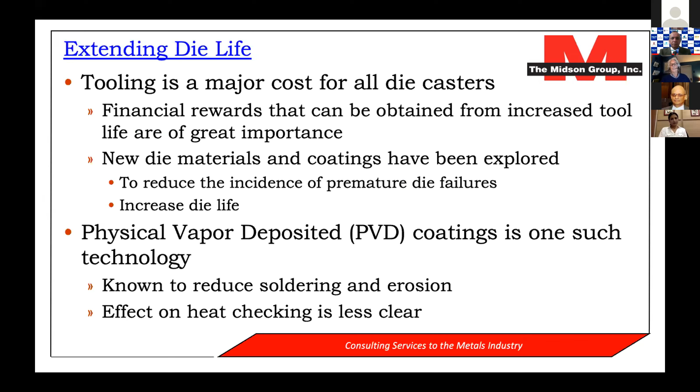So the one I'm going to be talking about today, as we just heard, is physical vapor deposition, or PVD. These coatings are one such technology, and they're well known to reduce soldering and erosion in die casting, but the effect on heat checking is less clear, and that's kind of what I'm going to be talking about today.

Surface treatments are the kind of treatments that we're used to in die casting: nitriding, ferritic nitrocarburizing, where we are diffusing either nitrogen or carbon plus nitrogen into the surface of our dies, normally about 100 microns or so, and we get hard layers on the surface of our die. So those are pretty commonly used in die casting.

Hard coatings are newer, over the last 20 years or so, and basically consist of PVD, physical vapor deposition, and CVD, chemical vapor deposition. CVD is not used a lot in coating dies because normally the substrate temperature has to be raised too high and will soften the die. So PVD is the process that's normally used.

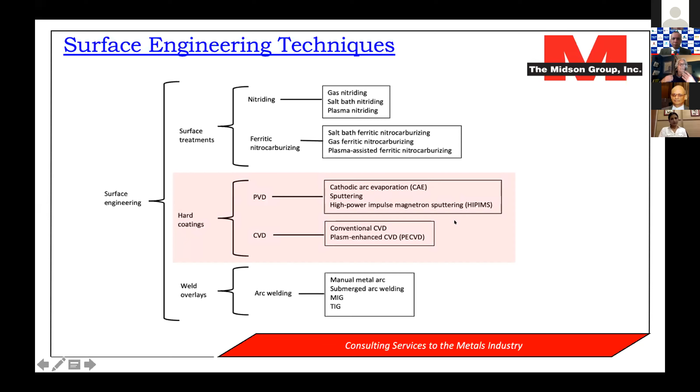Then the third one is weld overlays. Weld overlays, at least in my experience, are not commonly used in die casting, but have been used in the forging industry, where they also use H13 steel dies. So we're not going to really be talking about that today. The focus today is going to be on hard coatings, mostly PVD type coatings.

So in the presentation, as the chairman said, I'm going to be providing some results of a 5-year plant trial that's been going on in the US. The goal of the trial was to examine the impact of applying a PVD coating to an entire die. So any part of the die that was contacted by the liquid aluminum, we put a PVD coating on. I'm not talking about just coating small cores or small inserts, but coating essentially the whole die.

And so the goal was, could we apply PVD coatings and reduce the amount of conventional spray lubricant applied to the die? Basically, can a PVD coated die be run lubricant free with no sprayed lubricant at all? As I'll show a little later in my presentation, we didn't quite achieve that, but by reducing the amount of lubricant due to the PVD coating we got a whole range of other benefits that I'll describe later.

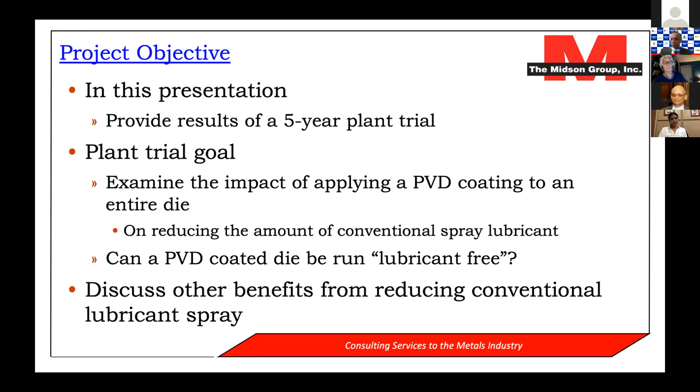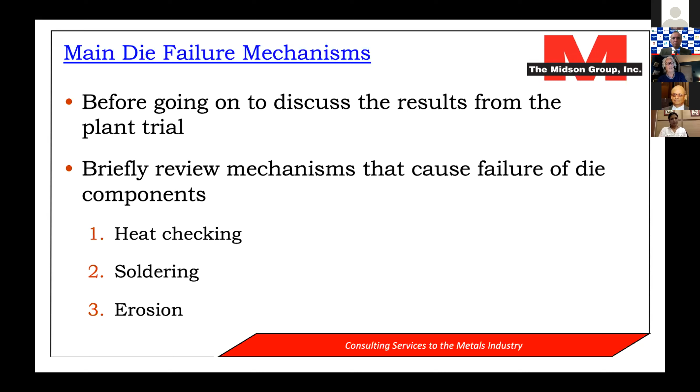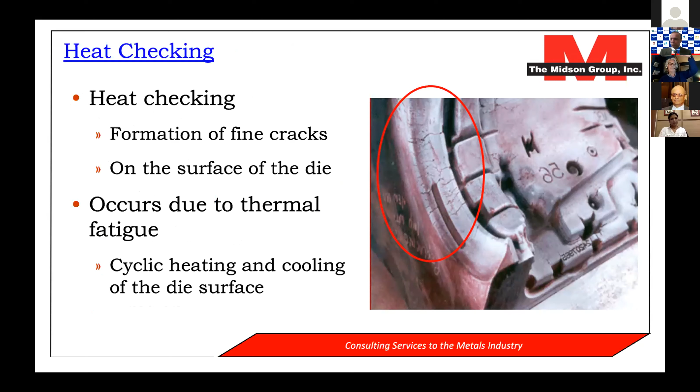So before I go on to talk about the plant trial itself, let me discuss mechanisms that can cause failure of die components: basically heat checking, soldering, and erosion. So let's talk about heat checking first. As die casters, we're all familiar with heat checking, the formation of fine cracks on the surface of the die. This occurs due to thermal fatigue, coming from the heating and cooling of the die surface every time we make a casting.

This figure is taken from a NADCA Congress paper by Jack Wallace and his co-workers from 1999. The vertical axis shows the surface die temperature in degrees centigrade, and on the x-axis we're looking at time in seconds, about 1.5 cycles here. We're looking at about 10 thousandths of an inch back from the die face, about 1/4 millimeter; 60 thousandths of an inch back, about 1.5 millimeters; and 1/2 inch back, about 12 millimeters or so.

So what we see is as the liquid metal is injected into the cavity, the surface of the die heats very, very quickly and then starts to cool. As the cavity is opened, it starts to cool even faster. And then as we spray the surface, it cools really, really quickly. Once the spray stops, the surface die temperature recovers.

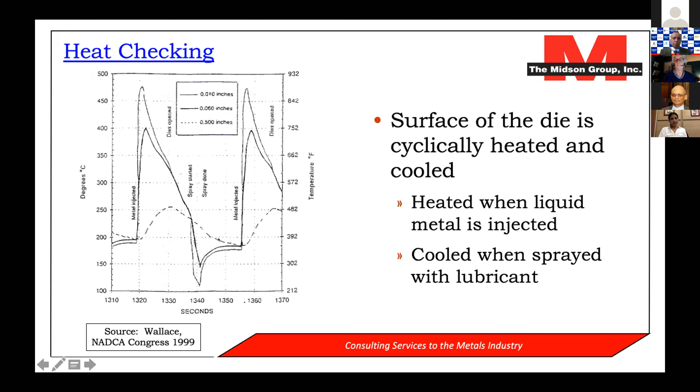But 1.5 millimeters back, we don't see it quite as hot as the surface when the metal is injected, and not quite as cold as the surface when we're spraying. And 12 millimeters back, we still see an up and down, but not as much. What this means is that we get this thermal fatigue cycle every time we make a casting.

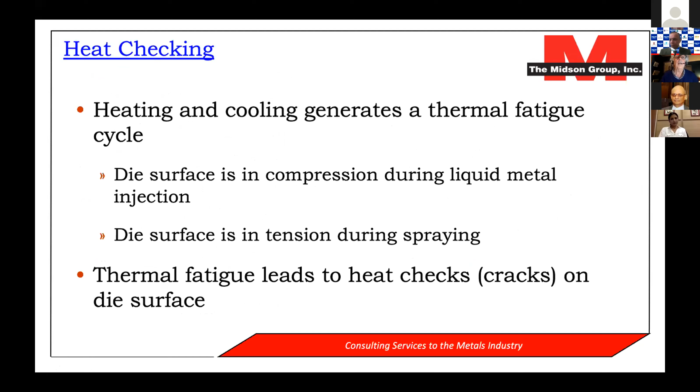When we inject the liquid metal, the die surface is in compression. When we spray, the die surface is in tension. So this tension, compression, tension, compression gives us a fatigue cycle, and this thermal fatigue leads to heat checking, or cracks on the die surface. Then if we go on and talk about soldering.

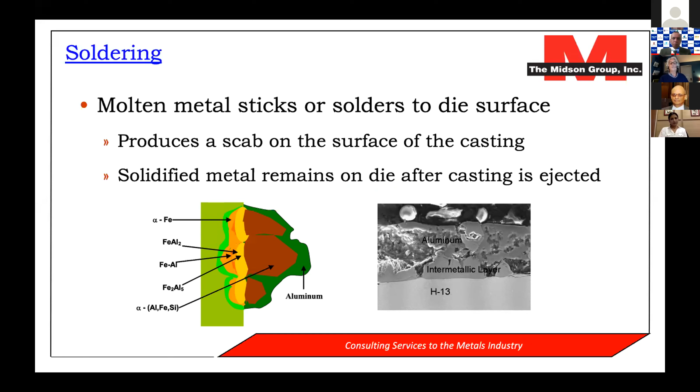Soldering, again, most die casters, I'm sure, are very, very familiar with soldering. This is when the molten metal sticks or solders to the die surface and produces a scab on the surface of the casting once we eject the casting, and then a small amount of the solidified aluminum remains on the die after the casting is ejected.

There's been several papers over the last 20 years or so providing the mechanism for soldering. Back in 2000, Shankar and Apelian gave a 6-step mechanism for soldering of the aluminum to the steel. They said initially the molten aluminum chemically attacks the die steel, mostly at the grain boundaries. And then we get formation of an intermetallic phase between the molten aluminum and the steel die. So the aluminum forms a compound or an intermetallic phase with the iron from the steel. And this phase acts as a glue so that the solidified casting sticks and solders to the steel die and makes it difficult to eject.

A couple of years later, another couple of researchers, Vishwanathan and Han, came along, and they said that they identified a minimum die temperature below which soldering will not occur. So below the temperature, no soldering. Above the temperature, we get soldering. And again, that's kind of familiar to most practical die casters.

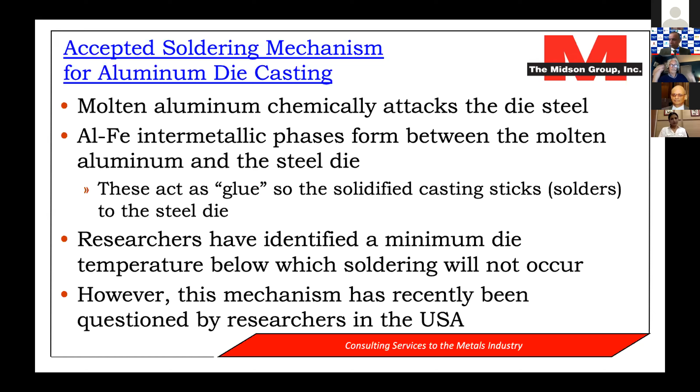However, just in the last couple of years or so, a couple of researchers in the US, Monroe and Sanders, have come along and questioned these mechanisms, whether it really is aluminum intermetallic phases causing the soldering. And so at the moment, at least, the mechanism for soldering is still a little bit up in the air.

And then for erosion, erosion is the gradual removal of the cavity die surface due to either mechanical action or to chemical dissolution. This is not the greatest photograph, but it kind of shows a little bit of erosion here, where part of the steel die has been removed by the action of the molten aluminum moving over it.

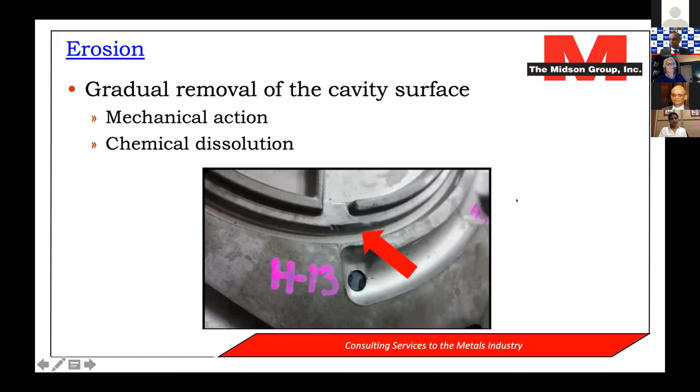And so there's basically 3 mechanisms for erosion. We have liquid impingement erosion. This is when the liquid aluminum, for example, is at a very high velocity around the gate, or maybe impinging directly on a core very close to the gate. And basically the steel die is dissolved by the liquid aluminum.

Then we can also get solid erosion. This is caused by the impact of solid particles during die filling, hitting on the die surface. Where do the solid particles come from? Obviously, silicon particles pre-solidified in the aluminum alloy. Oxides can be very hard, very abrasive, and they can cause quite serious erosion. And then other impurities, solid impurities in the aluminum alloy.

Then a third mechanism for erosion is cavitation. Cavitation is a special type of erosion. This is when we get the formation of small bubbles as the liquid metal is filling the cavity, and then the bubbles collapse at very high velocity and very high pressures against the surface of the die and can cause quite a large amount of damage.

And often we see this more in zinc die casting dies, not because it's more important in zinc, but some of the other mechanisms that we've talked about, such as heat checking and soldering, are less important in zinc die casting, and therefore we see the effect of cavitation because often the zinc die casting dies last a long time.

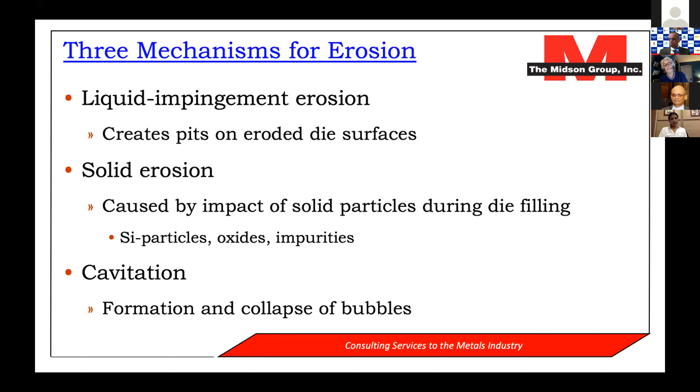So let me go on and talk about the plant trial. As I said at the beginning, it was a 5-year plant trial that was started in 2016. And so initially I'm going to talk about the early stages of the plant trial, and then I'll give some more recent results that we're seeing from the plant trial. So the plant trial was started in 2016 and was based on research results obtained at the Colorado School of Mines.

The research objective, as I've talked about before, is that if we pick an appropriate PVD coating and we apply it to all surfaces of a die casting die, can we totally eliminate the need for conventionally sprayed lubricants? Early on in the project, there was a lot of laboratory research performed at the university, at the Colorado School of Mines, and that showed that an aluminum chromium nitride coating was the best candidate. And so that was picked for the plant trial.

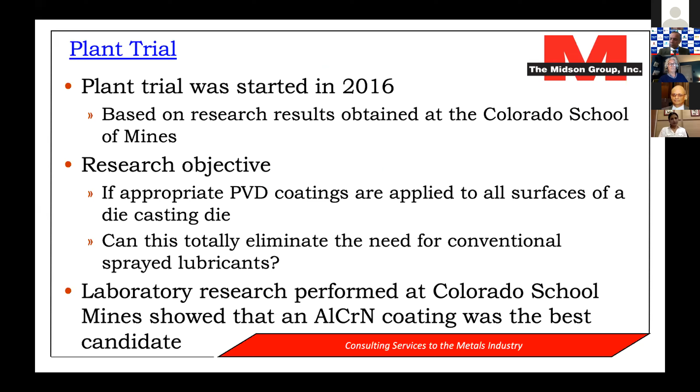So this is the casting that was chosen for the plant trial. It's a balance shaft housing, and it's used in the motor of an outboard motor for marine applications. It's about 150 millimeters by 150 millimeters in size, weighs about 0.8 kilograms. It's produced in a single cavity die using a 700-ton die casting machine.

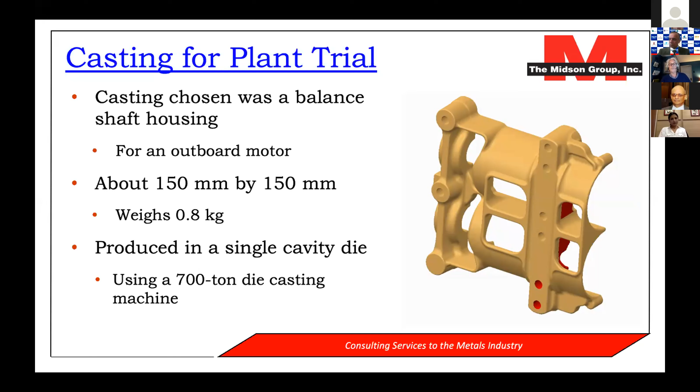And so these are some models showing the moving side and the fixed side of the die. And as I said before, any part of the die that is contacted by molten aluminum was covered with the aluminum chromium nitride. So on the moving side, that included the runner block, the runners, the cavity, the ejector pins, the overflows, the vents, and the vent block. And then it's exactly the same on the fixed side, the runners, the cavity, any core pins, and we don't show the vent block here, but that was also covered.

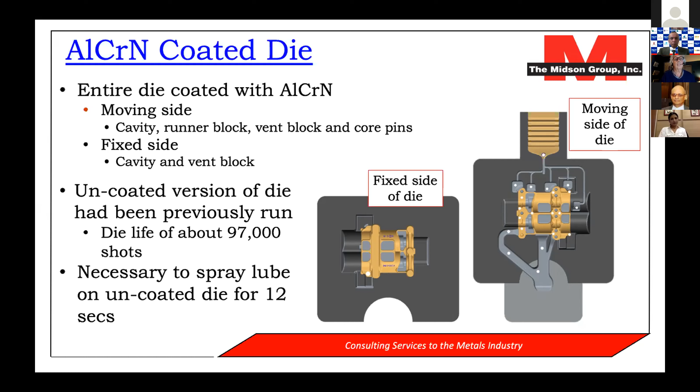What was nice about this die is that the caster that produced it had previous experience. They've been producing this casting for many years, and so they had experience with an old uncoated version of the die. And what they saw is that die had a die life of about 97,000 shots before it had to be replaced. And for the uncoated die, it was necessary to spray lubricant for 12 seconds.

So here are the results of the plant trial. So on day one for the coated die, initially we went from 12 seconds with the uncoated die to 2 seconds with the coated die. That's an 83% reduction in spray, and 70 castings were produced with no evidence of sticking. So then they went down to 1 second of spray, which is about the minimum amount of spray that they could run with their equipment. That's a 92% reduction in spray from the 12-second use previously, and they produced 30 castings with no evidence of sticking.

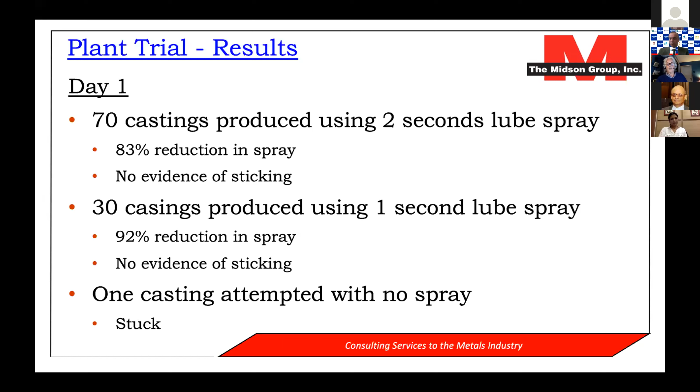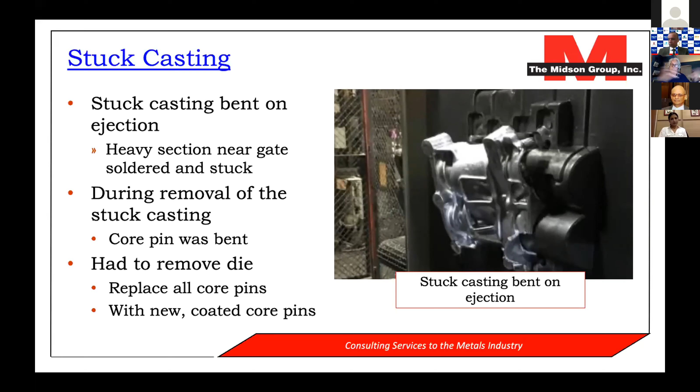So then they went to no spray, and they turned the spray off, and the first casting stuck. And not only did it stick, but it actually bent on ejection, as you can see here from the photograph. And so it looks like heavy sections close to the gate soldered and stuck. And then during removal of the stuck castings, some core pins were bent, so the die had to be taken off the machine, disassembled. Luckily, we had spare coated core pins that we could put back in, reassemble the die, put it back on the machine, and run it the next day.

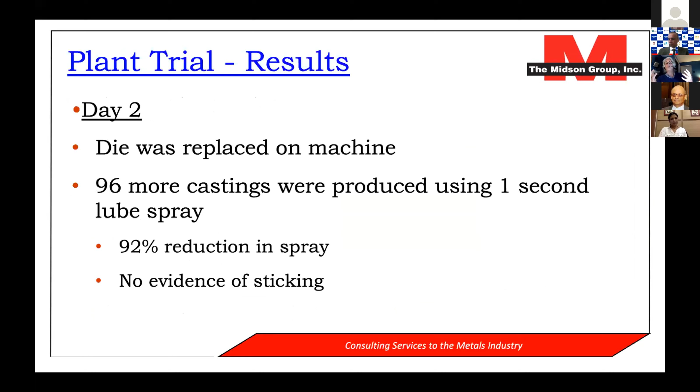And so on day two, the die was replaced, and 96 more castings were produced with this 1 second lube spray. That's a 92% reduction in spray. And again, no evidence of sticking. So we didn't quite get to lube-free, but pretty close. And what we saw were some other benefits that we observed from using the low level of spray.

And the first one was cycle time improvement. We were able to improve the cycle rate by about 12%, so cast 12% faster with the PVD coated die. Why? Because we weren't spraying as long. We used to spray 12 seconds, now we're spraying 1 to 2 seconds, so we can reduce the spray time, so the number of castings per hour is higher, and therefore production costs are lower.

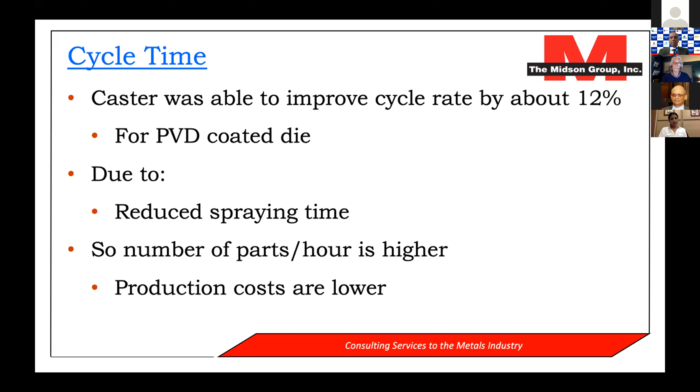But what was kind of interesting is this figure at the top here is comparing cycle times for 11,652 shots produced in the coated die versus 27,733 shots produced in an older uncoated die. And so if you look at the median rate, we can see this is the 11.82, 12% improvement in the median casting rate. But if we look at slightly slower castings, the third quartile, that was faster by 18%.

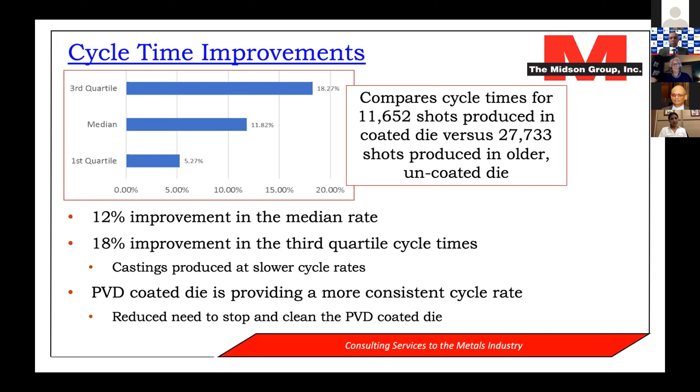And what we think is happening is that the PVD coating is producing a more consistent cycle rate because the caster didn't have to stop and clean the die so often. They didn't have to go in there and clean solder off the die quite as often with the PVD coated die, so they could actually go 18% faster. So a big improvement in cycle rate, which obviously again comes down to cost.

So as I said, that was done back in 2016, 2017. The plant trial is continuing. And so now here's some more recent data from 2019 and 2020. As I said, the information before came from 2016, 2017, but because the caster is only producing somewhere between 20 to 25,000 balance shaft housings per year, they're still running the die. So the plant trial is essentially still continuing. And the PVD coated die recently produced more than 100,000 castings in the same die.

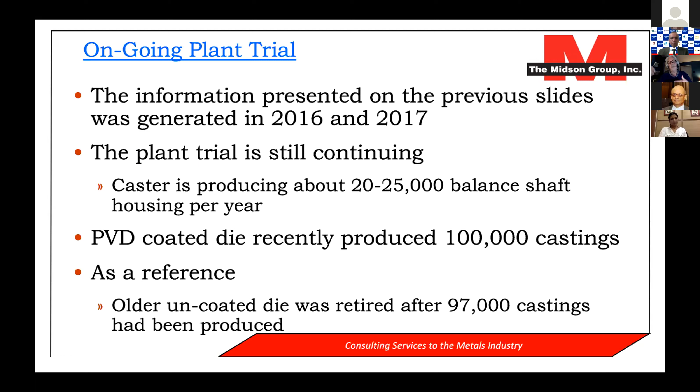I should say that this PVD coated die has required one welding repair operation that occurred after around 75,000 shots. However, the old uncoated version of the die required its first weld repair around 37,000 shots, and had a total of 3 weld repairs by the time it got to 75,000 shots. So only one weld repair for the PVD coated die, 3 weld repairs for the uncoated die.

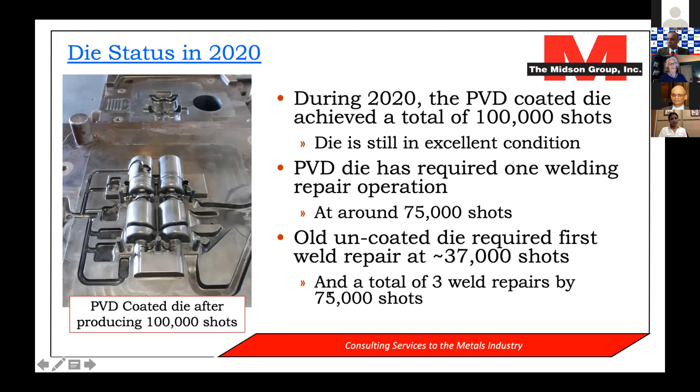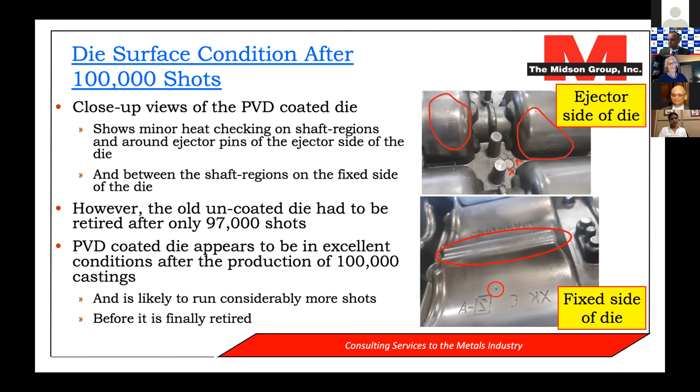So the PVD coated die does appear to be in excellent condition after the production of 100,000 castings, and is likely to run considerably more shots before it is finally retired. This is showing the pictures of the castings produced in the die after 100,000 shots. And because the die looks so good, it's not surprising that the castings also look very good, but they do. And again, here are pictures of a casting produced in the die after 100,000 castings had been produced.

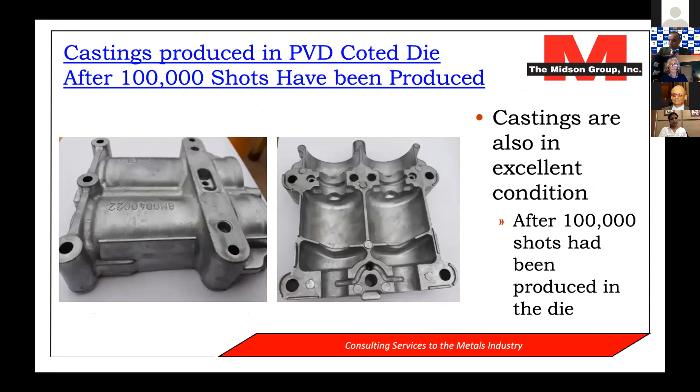So this begs the question, is it the PVD coating itself, or is it the reduction in spray that's allowing for this significant improvement in die life? And I think the answer is we don't really know yet. I'll give you my opinion. My opinion is that I think it's unlikely that it's the PVD coating itself. PVD coatings are typically quite thin, normally somewhere between 2 and 8 microns in thickness. And I think that's kind of thin to have a meaningful impact upon die life.

And the dunk tester takes in a steel sample and dunks it in a bath of molten aluminum for about 10 seconds, pulls it out, lets it cool, and then it's sprayed, and then it dunks again, and it goes through this cycle. It's kind of similar to a die casting cycle. And after 5,000 dunks and 10,000 dunks and 15,000 dunks, they take the sample out and look at the heat checking and characterize it. This laboratory technique has been used in America for about 60 years and has really helped us develop information on die steels and heat treatment and process conditions on heat checking.

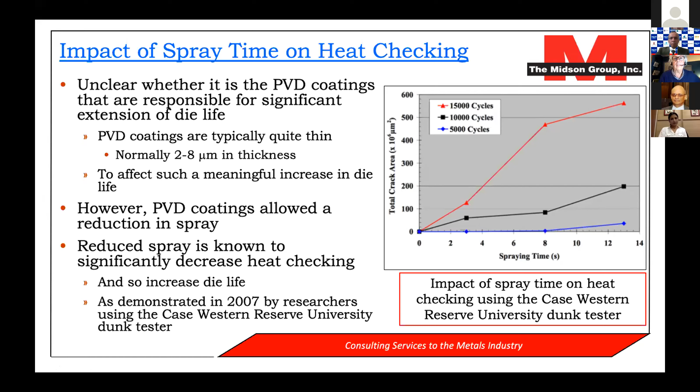And if we go to no spray time, at least in the test they did at Case Western, they saw no heat checking at all. Not to say that we wouldn't in a real die, but that's what they saw. So clearly reducing spraying allows us to minimize heat checking. And so I personally think that the use of the PVD coating allowed us to reduce spraying, allowed us to get an increase in die life. But that's not yet been proven. That's just kind of my opinion at the moment.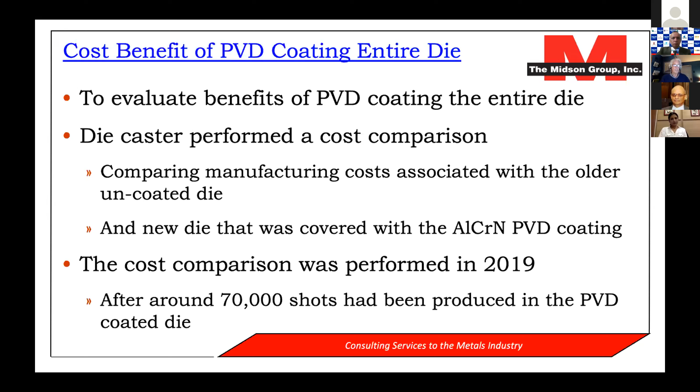What the caster has done is looked at the cost benefit of PVD coating an entire die. They performed a cost comparison comparing manufacturing costs associated with the older uncoated die and the new PVD coated die, PVD coated with this aluminum chromium nitride coating. The cost comparison was actually performed last year in 2019 after about 70,000 shots had been produced in the PVD coated die. And here's some of their findings.

So I talked about this a little bit earlier in the presentation, that the old uncoated die required 3 significant maintenance operations in terms of solder removal and then re-welding small pieces in critical areas. They had 3 significant maintenance operations by the time they got to 70,000 shots. With the PVD coated die at 70,000 shots, maintenance has not been required. The first maintenance was actually required at 75,000 shots.

Clearly reducing the amount of spray you use reduces cost because you can purchase less lubricant, and lubricant is not inexpensive. Improving the cycle time means that more castings are produced. Obviously that affects costs. But probably the biggest one is that the PVD coating, the reduced spray, appears to offset heat checking, and therefore we'll get a significant increase in die life.

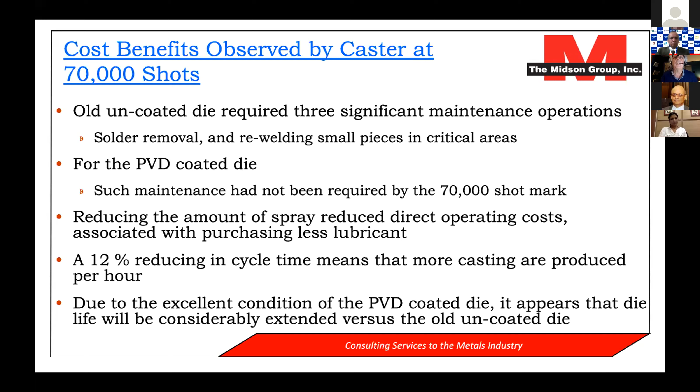So the caster actually did a quantitative comparison and looked at these 4 or 5 different parameters. And they looked at the savings after 70,000 shots as a percentage of the original tool cost. And so reducing die repairs, they said that represents a saving of 10% of the original tool cost. Reduced die lubricant, a saving of 5% of the original tool cost. Faster cycle, 5% saving of the original tool cost. And extending die life is a big one. Obviously, that's a huge one in terms of cost savings.

And so they estimated that. We don't really know the final figure yet because the die's still running, but they estimated that it would be a 25% saving compared to the original tool cost. Now, from all that, you obviously have to subtract the cost of the coating. Doing these PVD coatings, again, is not inexpensive. And they estimated the cost was 20% of the overall cost of the original tool. However, total savings, 25%. That is quite an impressive total savings.

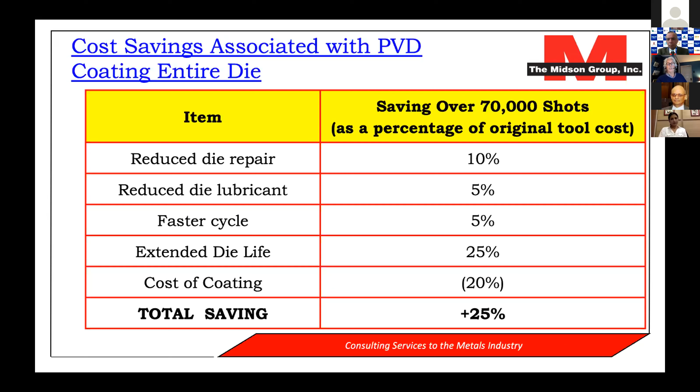So in terms of the plant trial status, the plant trial will continue with the PVD coated die. The plan is to run it to the end of life, so it might take us another couple of years or so to get there. And obviously, we want to determine how many more castings a coated die can produce compared to the old uncoated version of 97,000 shots.

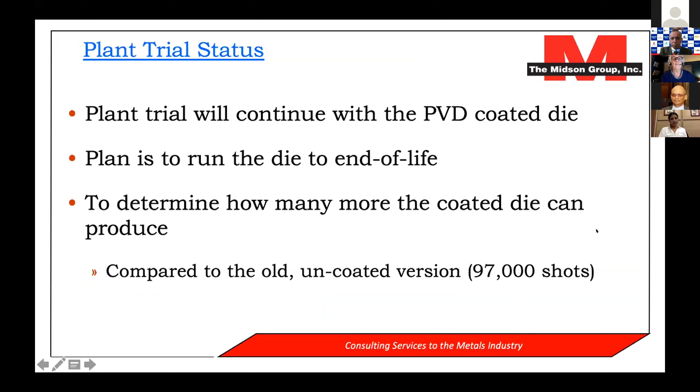So, in summary, it appears that there are many benefits of applying PVD coatings to die casting dies, not just in terms of small cores or small inserts, but larger portions of the die, or maybe, as we did here, the entire die. Firstly, a reduction in soldering and erosion problems. That's been known for a long time that PVD coatings provide those kind of benefits. But apparently you can get an improved cycle time as less time is required to spray the die.

Cost can also be reduced. You're purchasing smaller amounts of lubricants, and expensive die repairs can be postponed to higher shot counts. And then most significant, I think, is that a significant extension of die life can be attained as we get reduced heat checking observed with the PVD coated die due to the reduction in the lubricant spraying times. So that's my presentation.

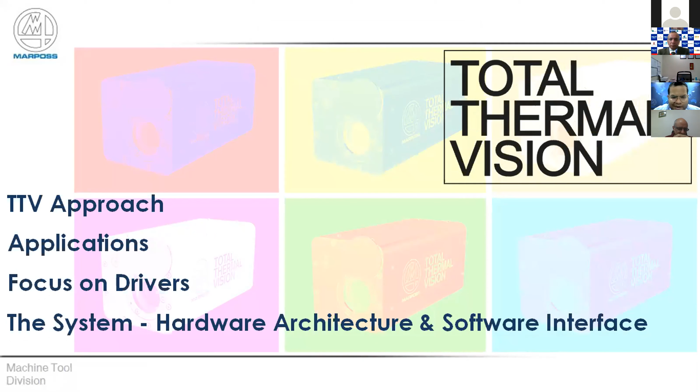Let me share my screen to introduce in detail the total thermal vision, basically a real eye for your pressure die casting machines. Is it visible to everyone? Okay, now let's begin. Welcome to all. So this is our approach for today. In this 40-minute session, we will discuss the TTV approach and its applications, the focus drivers, and in detail the system, its hardware architecture, and the software interface. Okay, we are moving ahead.

This is the approach which we will focus on - it's a TTV approach. So what we will do with the TTV in the pressure die casting facility is see and record the actual condition with thermal vision. That means we are seeing the die surface behavior, temperature behavior on the machine, and we are capturing that behavior in real-time conditions and storing it with data in our hardware architecture.

After that, through this recorded data, we analyze it to optimize your die casting cycle. And after this, the target achievable and expected optimization for your die casting cycle can be compared with your desired expectations.

I'm now going to play a 1.5-minute video showing the application of the Marposs total thermal vision. It will give you a clear indication of this process.

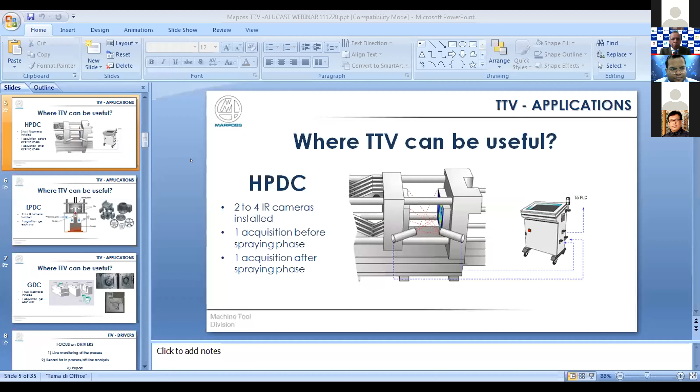So basically, this video showed you the real application of pressure die casting, the application of TTV in pressure die casting, and exactly the behavior of our TTV system.

Now we will discuss further on this TTV approach, the detailed system hardware and software architecture, and how we can incorporate this kind of system in a pressure die casting machine.

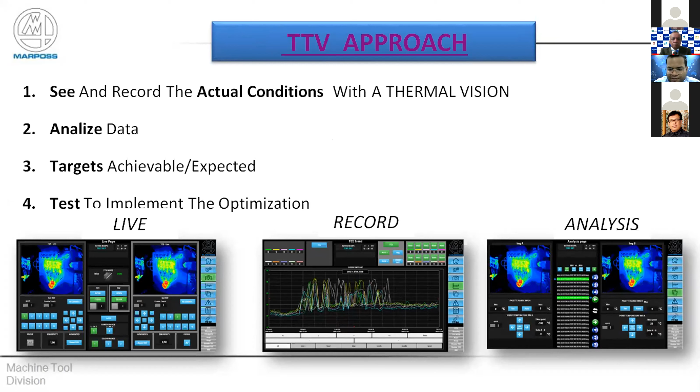The cost saving comes in terms of reducing lubrication in the machine, and optimizing cycle time when we have a real picture of your die surface temperature. This means cycle time will be reduced because uninterrupted sessions that used to happen in the cycle can be eliminated. Die lifespan increases because preheating and overheating can be reduced, which directly benefits increasing the die lifespan.

When we achieve these things in our machine, it directly increases machine efficiency and enables better analysis of process failure when we have all the records of real-time process monitoring. It gives you the analysis for process failure - what exactly are the points for process failure - and apart from this, minor uncontrolled process stops and process identification.

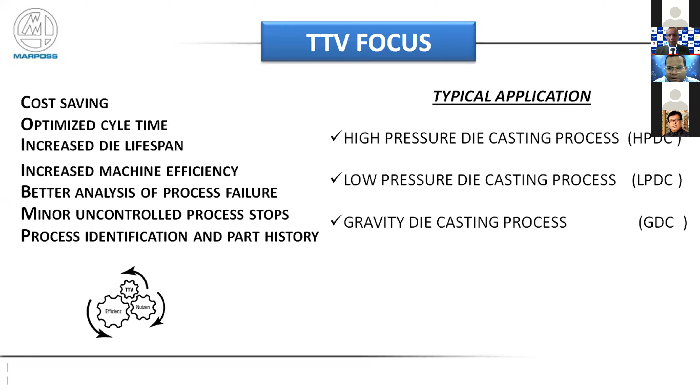Now, the typical applications where we can utilize our TTV systems - basically the TTV system initially originated for high pressure die casting. After that, seeing its usefulness, this TTV system is also being introduced in low pressure die casting process and gravity die casting process.

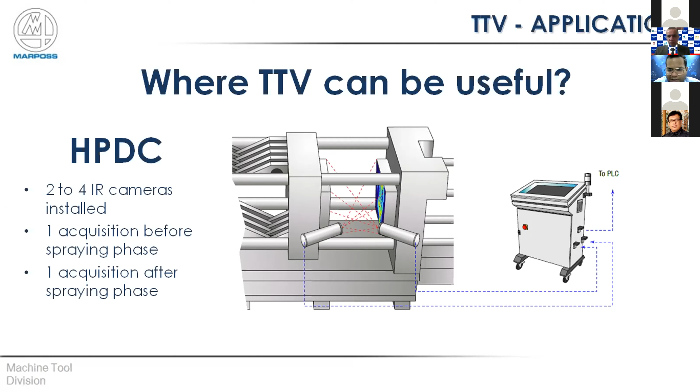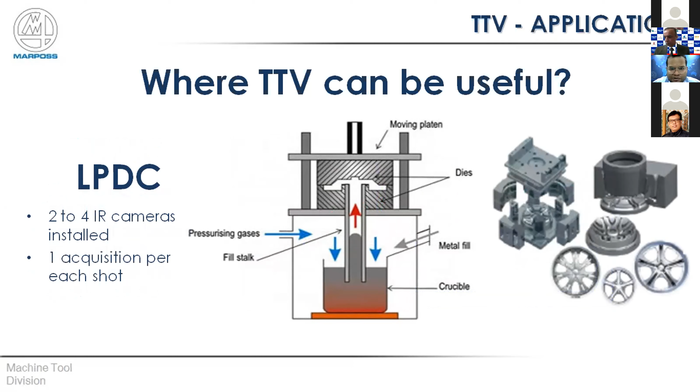And apart from this, now we are going for the low pressure die casting. In low pressure die casting, what exactly we will do, we acquire one image per shot. In high pressure die casting, we are acquiring 4 images per shot. And the same thing we can do with the gravity die casting machines, according to the application, the requirement of the dies, the complication of the dies, with 1 or 2 infrared cameras, and we do one acquisition per shot.

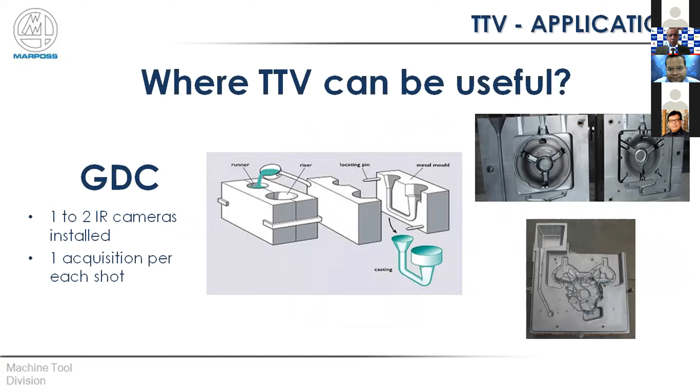Okay, so we will talk about the focus on the drivers. The focus on the drivers simply means what exactly the driving factors are that will make you think about this kind of system in your facility. First, definitely, is the live monitoring of the process. This type of system will give you a live monitoring approach of your process.

Traditionally, in this approach, an operator will go to the machine with the pointed gun and all that to acquire the images from the die, and after that they go to the room and see them on some computer, and just after that they used to do some remedies or take some action. But when you have the live monitoring, you can see live what exactly is happening on the machine, and accordingly, in real time, you can also take the actions.

Okay. And the second focus for the TTV systems is the record for in-process and offline analysis. This is used to record, to have a focus during the process, and also during the offline analysis. Like from one week before, you have some pictures, you want to do some analysis, you just call that picture for a particular time, particular shift, and a particular part number. So accordingly, you can also do that analysis.

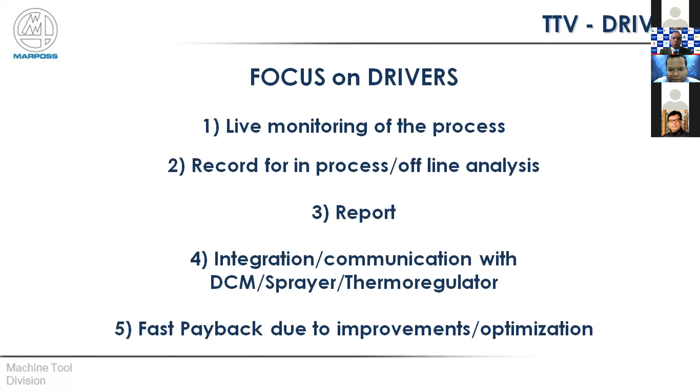The fourth one, as we are talking about Industry 4.0, is basically the main factor: the integration and the communication with the DCM, the die casting machine, sprayer and thermoregulator. This TTV system can very easily communicate with your die casting machine, with your sprayer and thermoregulator, take the feedback from the machine, and also give the outputs to the machine. And regarding the ROI, when we talk about the cost, there is fast payback due to the improvement and the optimization.

So it will give you the real pictures, what exactly the behavior of my die surface is before lubrication and after lubrication. So it is useful for you to easily identify the preheated or overheated areas, and where you have to put more effort on the critical points. So it will give you the real picture.

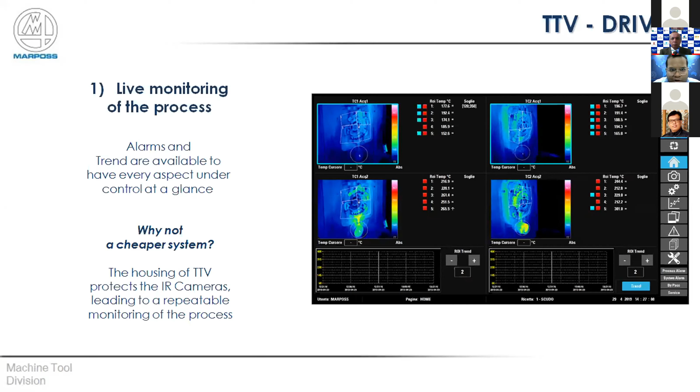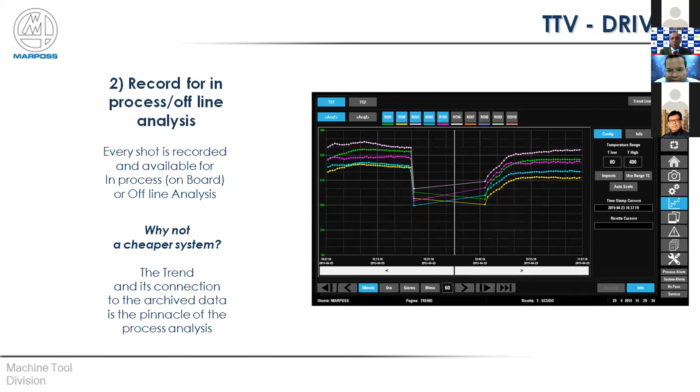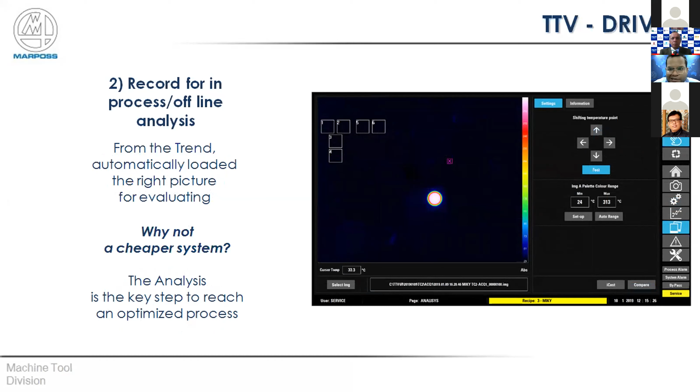This is the record for the in-process and offline analysis. You can just call that record from your past manufacturing data and compare it with real time. So if there's some problem in a machine, like some points where we are not able to achieve the part quality in some areas, you can just call the picture from the good parts and do the analysis. So apart from this, these kinds of reports you can generate to have the analysis in your facility over the whole period.

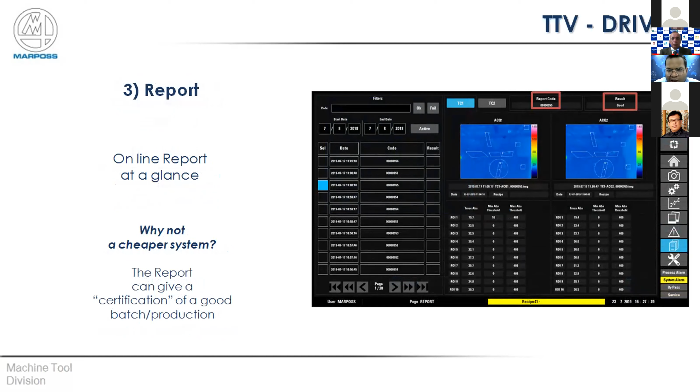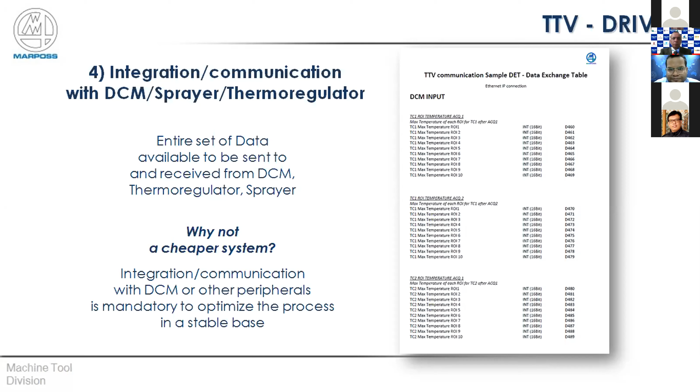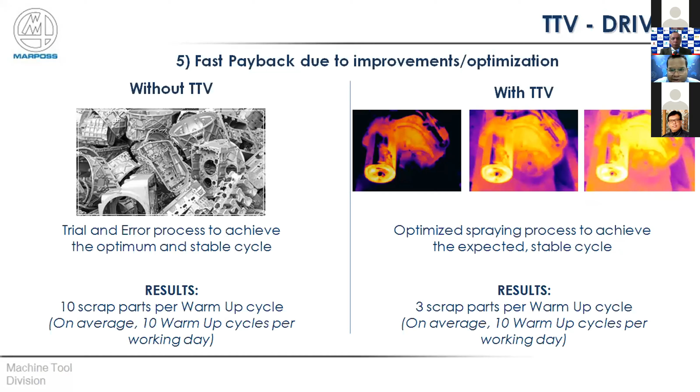So this is the main part. Also, how we can achieve results in terms of cost: in the warm-up cycle we can easily get an idea of how many warm-up shots are needed. The trend is that we give 10 standard warm-up shots, and the 11th will be the okay one. When you have the real picture, it could be that only 3 or 4 shots are warm-up shots and the 5th shot is okay. We have already achieved this in our past installations in industry: the warm-up shots can be directly reduced with the help of the TTV.

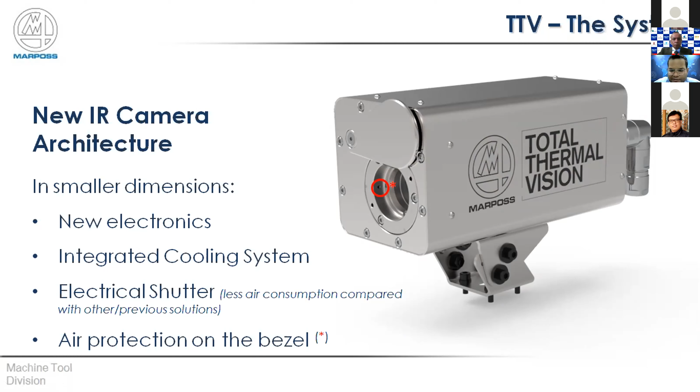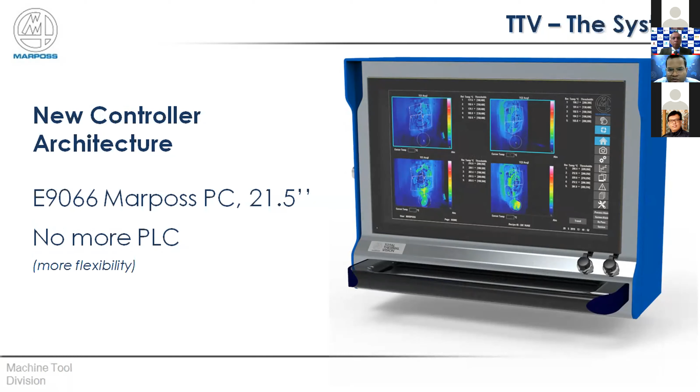Here you can see the display device for the camera. We provide an industrial PC for the facilities. Depending upon the application and the configuration of the machine, we provide the standing one or the overhang one. It depends whether you want to place this display near the machine or at some distance from the machine. Every configuration is possible depending upon the infrastructure.

And here you can see the 4 pictures to evaluate. You can see these are the ROIs. It is very easy to evaluate each and every pixel. It is not only the 20 points or the 10 points you can see; by moving this cursor, you can also get the temperature of each and every pixel of the die.

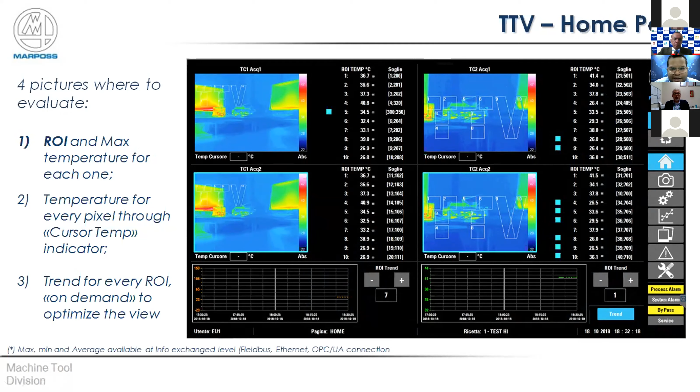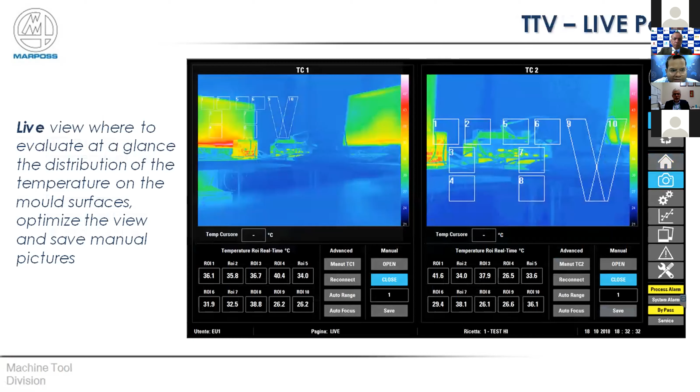So this is the live view image, where you can evaluate at a glance the distribution of the temperature on the mold surface. This is basically to optimize the view and save the manual pictures. And this is basically the setup page.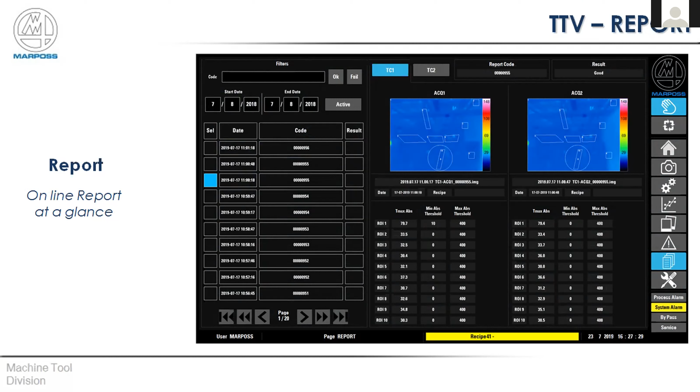This behaves just like a passport. So it is a passport for every part. If you are talking about high pressure die casting, you have 4 images for each part. So it will be like a passport for a good component. During the process, these are the points where we maintained an ideal temperature, maintained the temperature limits during the process.

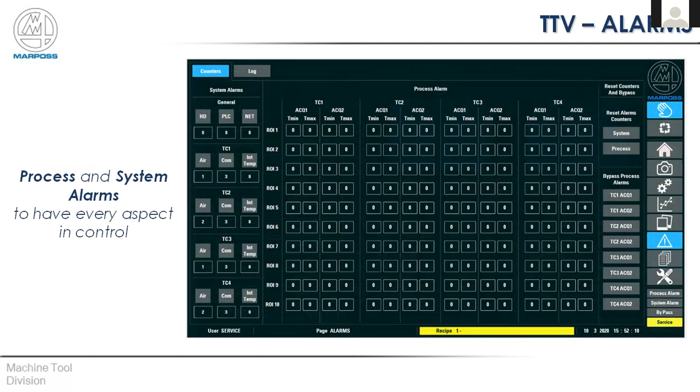And these are the alarms, what we talked about with the T minimum, T maximum. You can get real-time alarms to your DCM machine. And process and system alarms, detailed alarms, whether it is during a malfunction, you can get it in the machine.

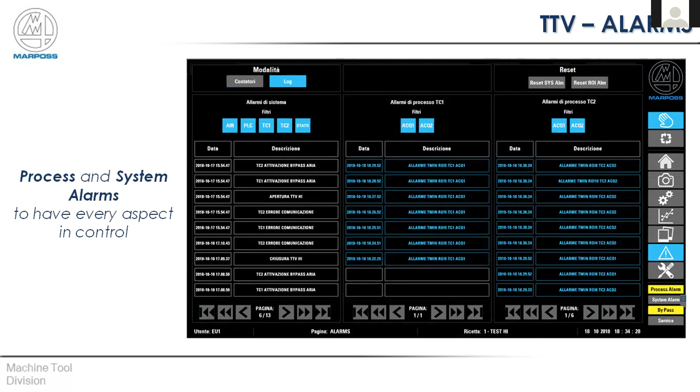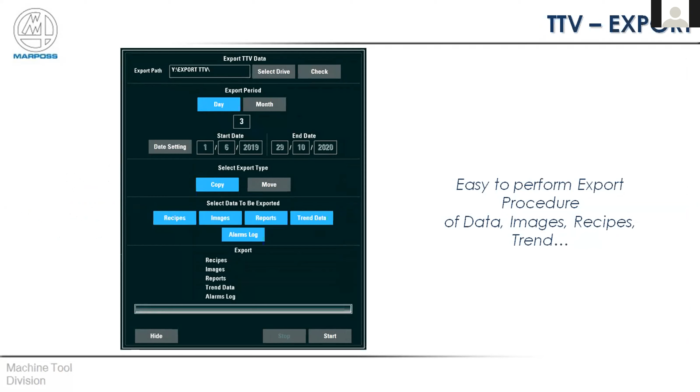And basically this is the point, it is easy to export the data, because every data is stored in our machine. This data can be exported and easily shared on your sharing platform, in your cloud management, through the SCADA, through different platforms. You can have that data and easily see it from wherever you want.

And now we are talking about it because different parts are running on the machine, depending upon the part program and recipes. So there's a facility to create different recipes. Currently we have the facility for 50 recipes, so 50 parts on a single machine, on a single system. You can create that recipe, and whenever the part is coming, you can just call that recipe, and our system will behave for that part on the machine. So this is for the communication, as we discussed already.

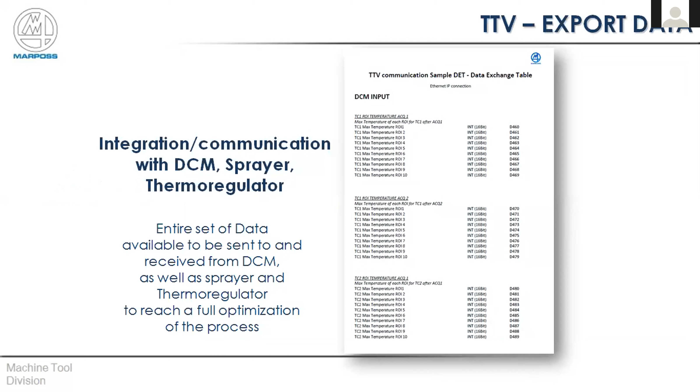And thank you so much for giving your time for this presentation. Now we can move forward to the question session.